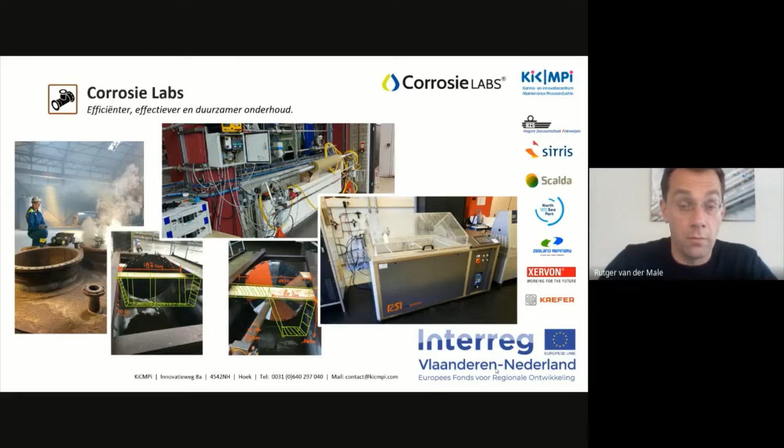Goed, ik denk even genoeg over het project. Dit is even een impressie van wat er zoal gebeurd is tot nu toe, en we hebben nog even te gaan. Dit zijn echt nog prototypes van installaties. In het midden onder zie je van de Hogere Zeevaartschool op het ponton. Boven midden bij Scalda, en rechts meer de situatie bij Sirris. Nogmaals, prototypes. We verwachten in de loop van het jaar, het einde van het jaar, dat we wat meer naar definitieve installaties toe gaan, waarop bedrijven ook gewoon echt hun ding kunnen doen.

Ik zou afsluiten met een kort reclameblokje. We hebben volgende week nog, op 8 juli, nog een webinar, ook vanuit het CorrosieLab georganiseerd, waar Sirris en CUI presenteren. Dan gaat het over met name hoe je corrosiesnelheden kan meten. In de loop van juli, lanceerdatum nog niet helemaal bekend, komt de website live, met veel meer informatie en ook projectresultaten en dergelijke. En in oktober is ongeveer de opening van de verschillende labs te verwachten. Tot zover even het KIC MPI en het CorrosieLab verhaal.

Laten we het iets interessanter maken en KAEFER het woord geven.

Good afternoon, everybody. My name is Clare Watt. Ben has asked me to introduce myself. I'm an integrity engineer working for KAEFER, and I joined KAEFER in 2018 to help develop expertise, innovation and training in the field of corrosion under insulation.

I've got 20 years operational experience in upstream corrosion and integrity management. I've held staff roles within service companies, several international operators, and also worked as a consultant for a few years, providing quite a lot of CUI consultancy to different companies. One of the reasons for this is that every job I've ever done has always involved sorting out some kind of CUI issue. So I've planned, funded and overseen execution of CUI improvement programs, field upgrades, design upgrades. I've provided consultancy, failure investigation, cold eyes reviews, and created strategies and risk-based inspection methods for managing CUI.

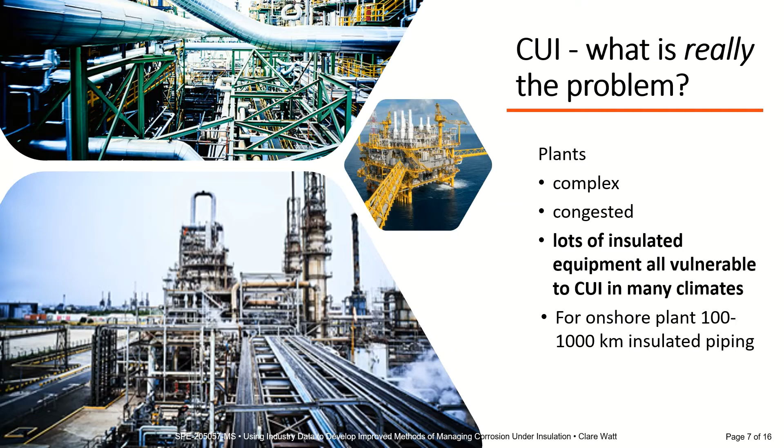But despite this often large amount of vulnerable equipment, significant CUI is often highly isolated, and where it does occur, exhibits wide-ranging severity. So many plants that have fully stripped the insulation from all their critical equipment, either later in life or sometimes following a big failure, often discover most of the equipment's in good condition.

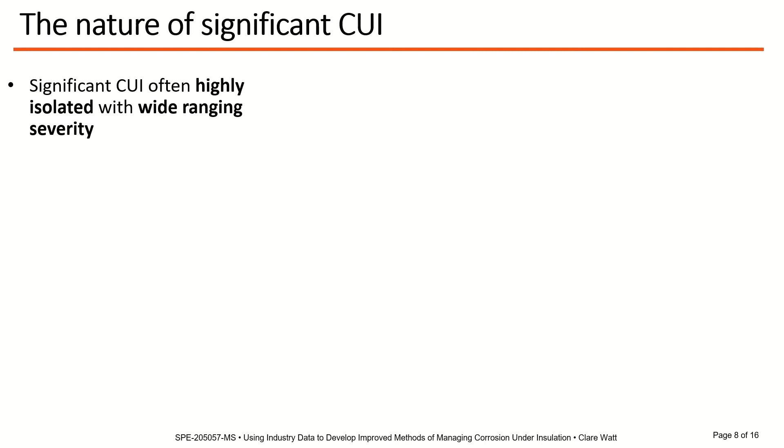In other words, it takes a significant inspection effort to prevent a handful of critical failures in a plant lifetime. And because we can't predict where and when significant CUI will occur, this inspection is resource intensive, so it means high coverage, conservative inspection intervals with a reliable technique such as removal of insulation.

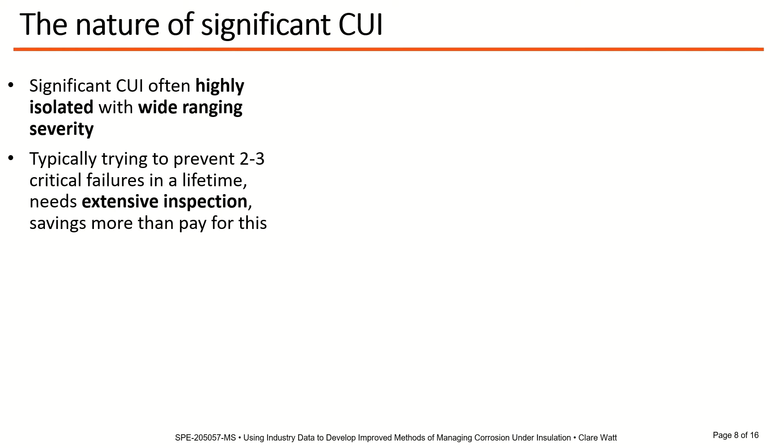Preventing a few critical failures can, however, more than pay for this inspection effort. So it is ultimately often cost effective as well as obviously desirable from a process safety perspective and to avoid regulatory penalties. The knowledge, in fact, existed to prevent these recent critical failures that occurred over the last few years.

But similar plants aren't all implementing the same inspection strategies, and this may have something to do with the fact that any regime can appear to be working for CUI for a very long period of time until a critical failure occurs. The isolated nature of CUI, however, provides a big opportunity to significantly reduce the cost of inspection, and this is what continues to drive innovation.

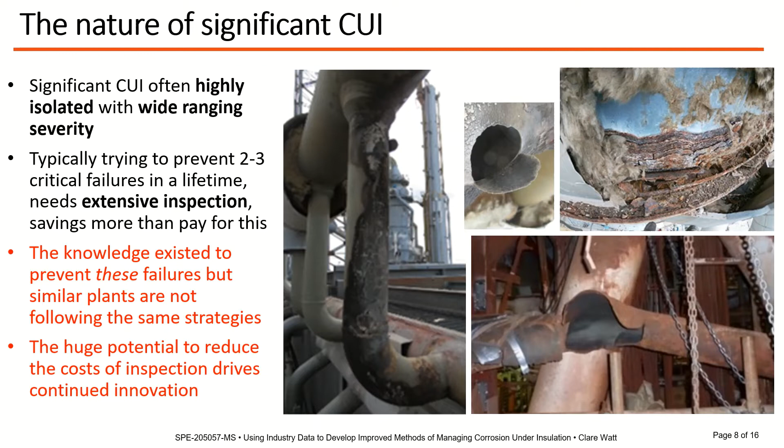Another problem is that it's not often made sufficiently clear that our CUI prediction knowledge comes from real plant data. The problem is that these data are not often widely shared. Only a handful of plant CUI data sets underpin our published and in-house guidance, and each new data set has revealed something new and useful right up to 2019.

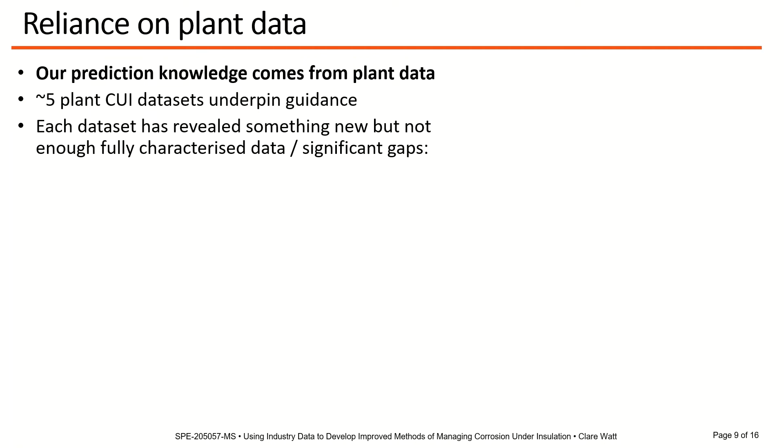But they aren't fully characterized by enough variables and metadata, and there remain significant data gaps, such as critical failures, newer coating and insulation designs, and data from plants in different climates. So here are some examples of shared plant data sets. And you find yourself asking, what would this data look like for certain newer coatings or insulation system designs, or for different parts of the world?

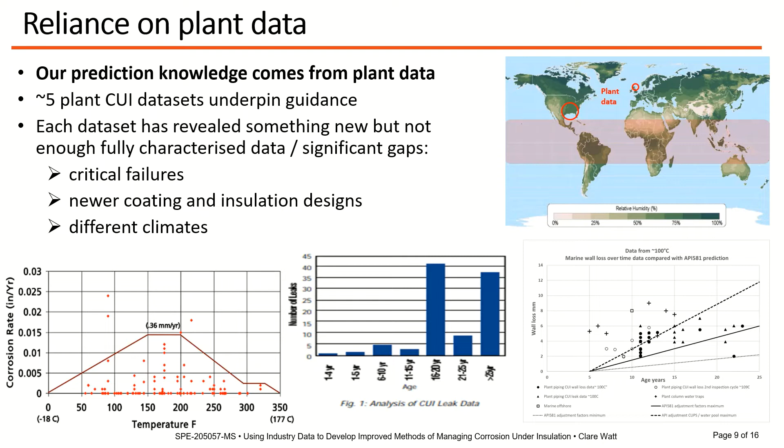So the existing data sets that are shared all come from temperate, high humidity climates, but there are no data for offshore platforms, landlocked locations, arid climates, or those plants located closer to the equator in the tropics, where in high humidity regions, CUI could be much more severe for equipment operating at lower temperatures due to sweating.

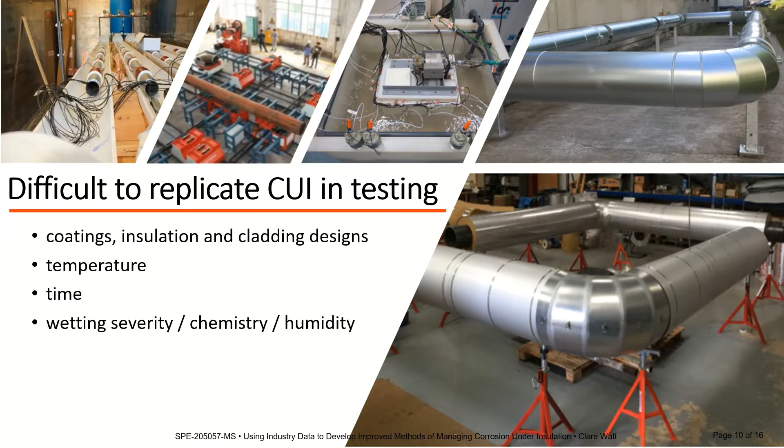And one of the reasons why we are reliant on plant data for our CUI knowledge is that it's difficult to replicate CUI in laboratory testing, or so far it's been difficult. This is because there are so many combinations of influential variables to consider when trying to recreate realistic conditions to realistically predict coating or insulation design or detection technique performance.

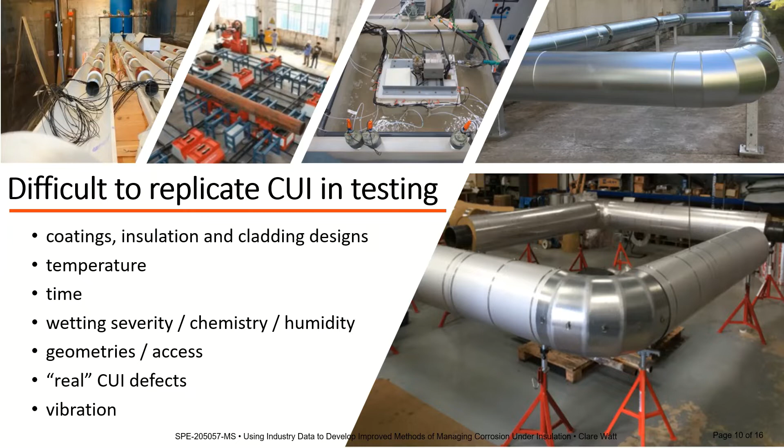So this is perhaps why so far real plants are our ultimate test rigs. These photos all show some recent examples of laboratory test setups. They're a great start, but it's pretty obvious they're quite simple compared with real plant.

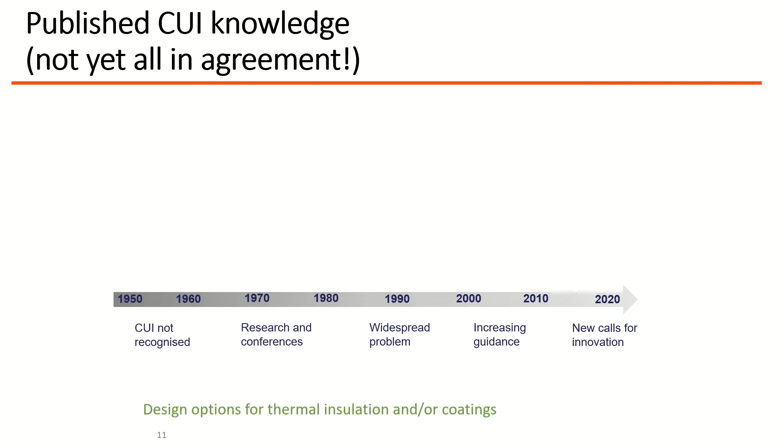We're lucky enough to have a wide range of published CUI knowledge and guidance out there in the industry. But one of the difficult things for individuals coming into the CUI topic area is that this guidance isn't apparent to be in agreement. There's so much of it that you have to read all of it in order to distill a general consensus, and that consensus is that prediction is limited by lack of data, so conventional risk-based inspection methods still have to be conservative.

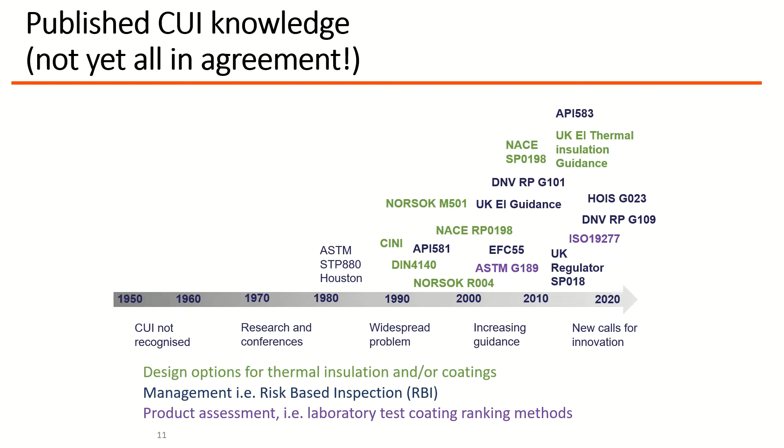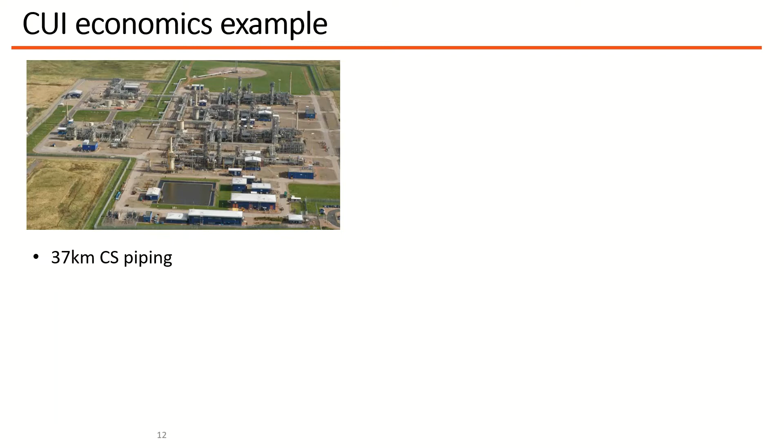This is just an example to show that conservative CUI management can be cost effective, even though it's expensive. This plant had 37 kilometers of insulated carbon steel piping, and it implemented conservative inspection. During the first 30 years of operation, the data from this plant showed that it spent 10 million on looking after this piping, mostly focused on 10 to 15% of the most critical equipment.

And on the other hand, performing this inspection prevented 3 to 4 critical failures, which would have cost much greater than 10 million. So overall cost effective, though expensive. But we do wonder whether this is true for all plants.

Putting all this information together means that there are some key challenges facing the evaluation of the performance of new CUI technologies, which impacts their integration into our day-to-day CUI management regimes. There's a wide range of innovative products and CUI solutions out there, and these can be divided into 3 categories: prediction, design, and detection. All these categories interact with and influence each other, so it's highly likely that industry will need to make progress in all these areas in order to move forwards.

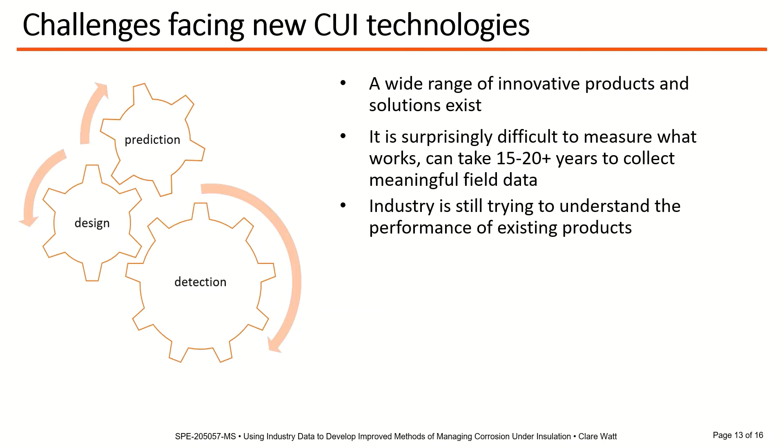It's surprisingly difficult to measure what works for CUI because we rely on field data. It can take a long time to collect meaningful data, and perhaps that explains why the industry is still trying to understand the performance of existing products, some of which have been around for quite a few years. Currently, no technology has yet been proven as universally better at preventing critical CUI failures than conventional reliable inspection.

For example, marine plants in a temperate climate might inspect their carbon steel insulated equipment every 6 years by periodically removing all the insulation, at least for the most critical equipment operating at higher temperatures.

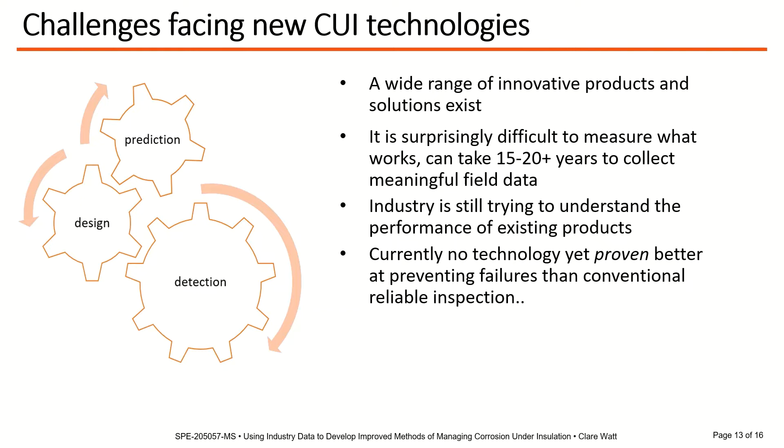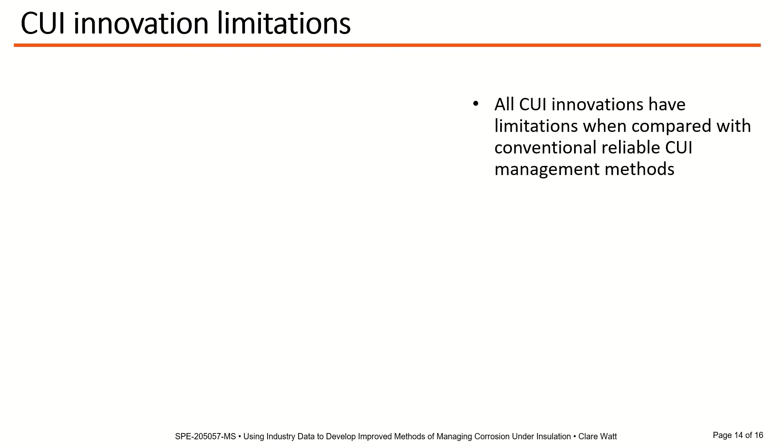And there are some key common factors that stand out. Some solutions aren't widely deployed, so they've not been given a chance. For example, drain holes, widely recommended in key published insulation design good practice, and yet they're hardly ever adopted.

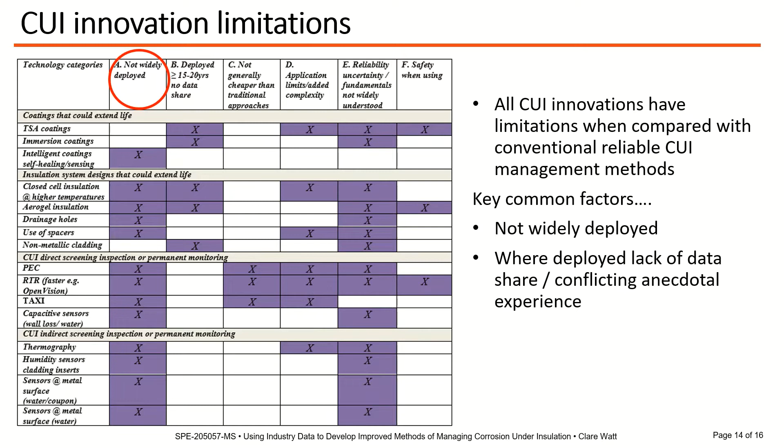Where products have been deployed for long enough, such as superior coatings, closed cell insulation at higher temperatures, and others, there's a lack of shared data sets and also conflicting anecdotal experience, which probably both contribute to a general uncertainty in reliability or performance. It's worth mentioning that there are other limitation types, such as application limits, cost effectiveness, or safety when using, which also drive the limited use for some of these products.

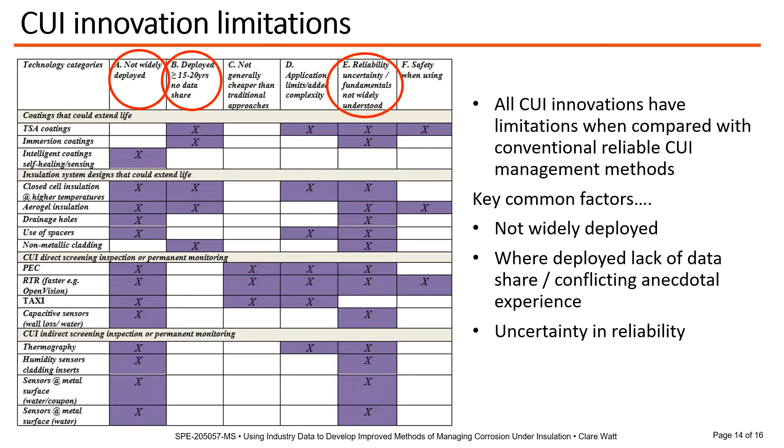So if we look at an analysis of 13 recent critical CUI failures - and critical CUI failures are not widely shared, and there are probably more - these come from marine, onshore and offshore facilities in a temperate climate. The majority would have been prevented by using reliable inspection schemes that some plants are operating today.

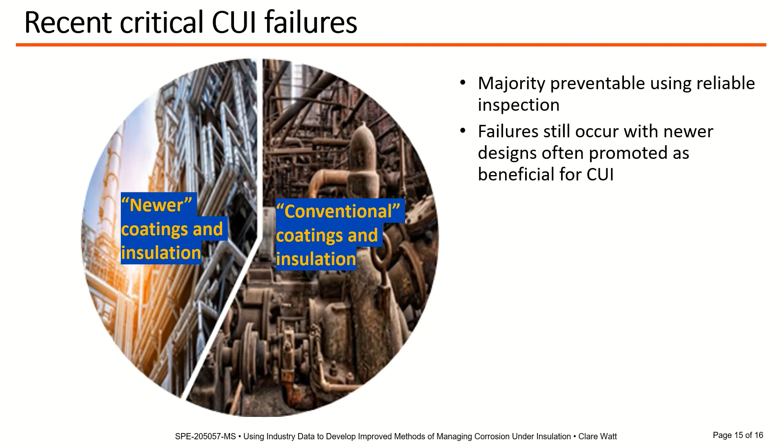But failures continue to occur with newer coatings and insulation designs that are often promoted as beneficial for CUI and for which many operators take credit in order to relax inspection. So is this simply a quality control or application issue, or is it a fundamental limitation of some products that has been discovered in the field that could be avoided if better shared and understood? There is an opportunity to improve the use of existing products before dismissing them due to isolated failures.

So here are some examples of the limitations of some CUI design solutions.

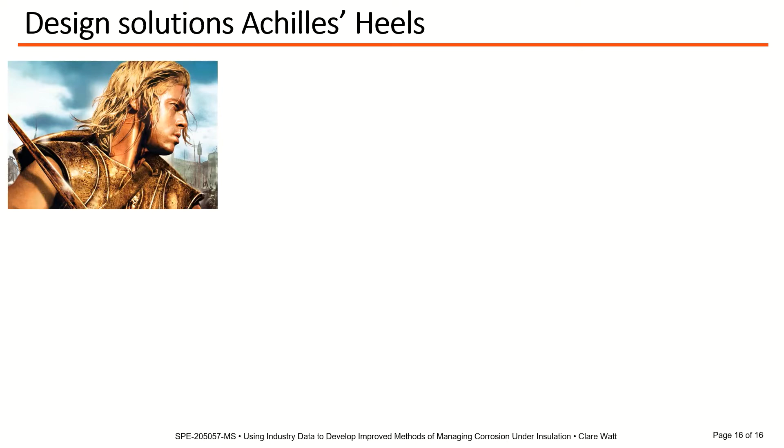Hello, Brad Pitt here, representing the Greek warrior Achilles. The definition of an Achilles heel is an often surprising weakness in an otherwise strong or powerful product.

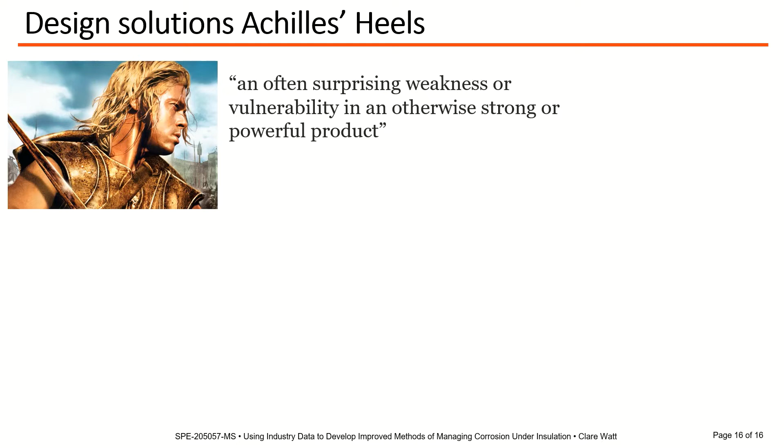It's currently believed by the majority of organizations that a superior coating, such as thermal spray aluminium, a closed cell insulation, and a non-metallic cladding weather barrier, all represent the best combined insulation system design choice to combat CUI. But if these materials aren't deployed correctly, they can actually accelerate CUI and make it more severe than it would have been for conventional insulated systems.

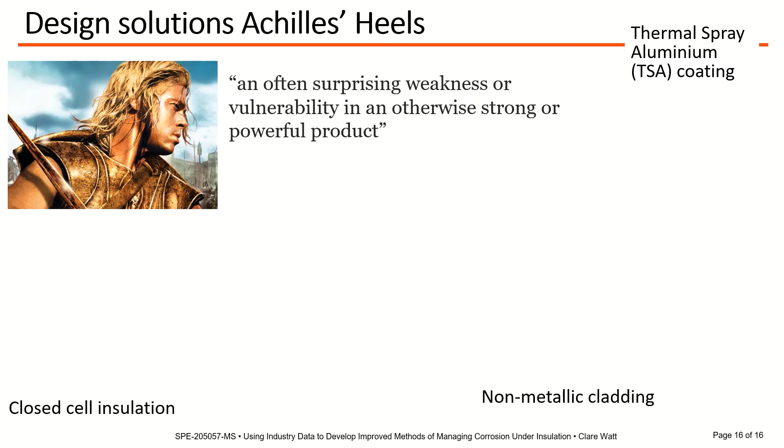For example, TSA is vulnerable to occluded cell corrosion, which can be initiated by applying a too thick sealer or top coat, or anything else that forms a tight crevice at the equipment surface. As far as we're aware, it's only been reported for marine environments, as chlorides are involved.

Closed cell insulation might not absorb water, but water can still get trapped at the metal surface and cause CUI. And the use of adhesives to fix the first insulation layer can not only accelerate CUI, but also cause it to occur in unusual locations, which might not be detected by prone area inspection schemes.

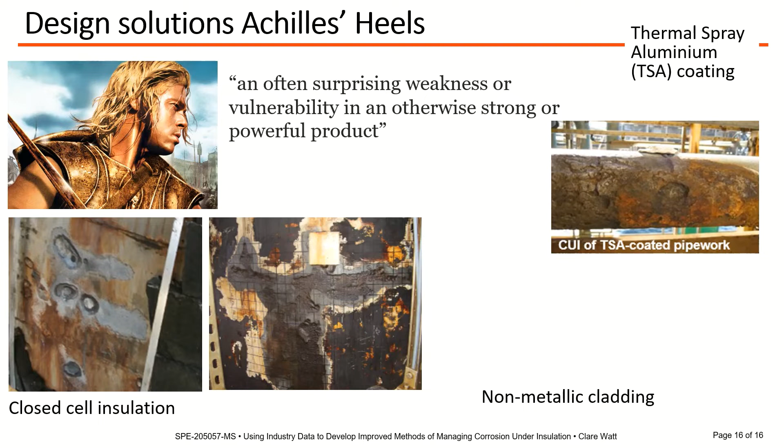On the left, corrosion rates of 2 millimeters a year being reported, and on the right, maximum cumulative metal loss of 11.5 millimeters over 6 years in service.

Finally, drain holes are especially important to apply for non-metallic cladding.

However, we don't believe that any of these Achilles heels, or the conditions that trigger them, are sufficiently widely understood. But the good thing is they could all be avoided to maximize the value of these products, to slow down CUI, or at least not to make it worse.

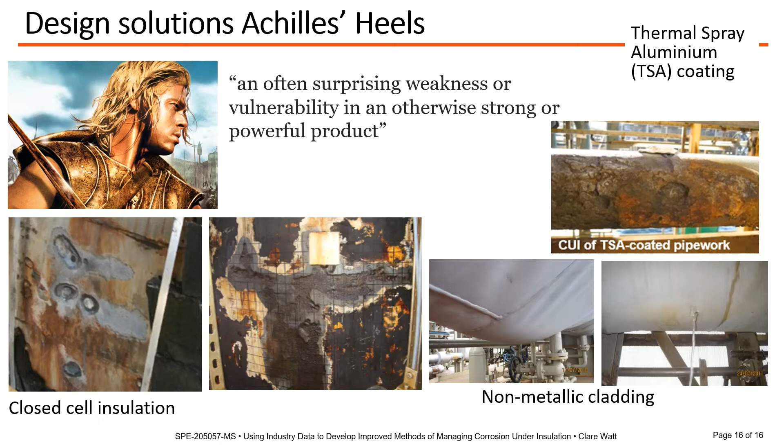So I'm just going to, with this slide, click through some of the serious CUI inspection findings and failures that we're aware of that occurred over the last decade or so. I'm going to try and speak about them in a general way while introducing them on the slide, which is quite difficult.

So the first thing we notice is that they occur for different temperatures, over different timescales, for materials of different wall thickness and different designs.

Collectively, they do teach us to be very careful not to make too many assumptions when predicting CUI for highly critical equipment, whether it be associated with wetting, taking credit for different designs, or where the CUI will occur. For quite a few of these, there were no visual signs of CUI before removing the insulation, and many occurred in locations considered as lesser prone areas, which might not be inspected by some company inspection schemes.

So API 581 estimates, however, could well double the CUI timing experience if the plants were located in a landlocked area compared with these marine, onshore, offshore examples, which I find really interesting.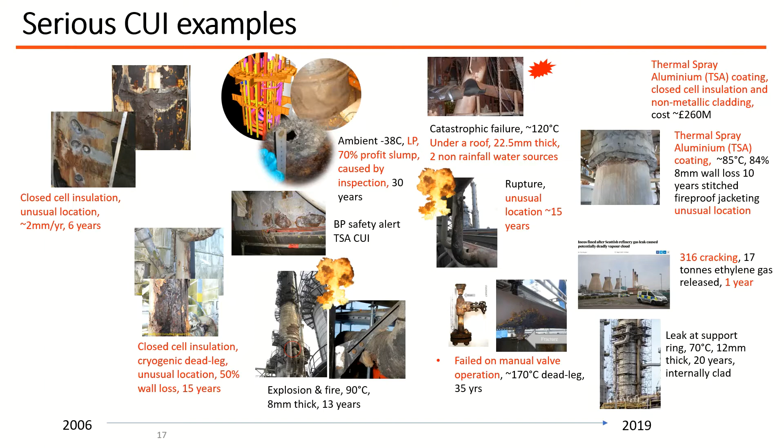We're still getting TSA reported issues today, but it would be really good to confirm that these are QA/QC or occluded cell issues that we can learn from and avoid. So it would be great to have more of these failures reported and logged in a database and compared with general good performance in order to perhaps do some more effective prediction. As I indicated previously, there is potential to improve CUI prediction by sharing more plant CUI data.

This is just an example only, but here's a set of real CUI data: metal loss in millimeters versus time in years. And this applies to carbon steel CUI failures or inspection findings. There's no key, so you don't know what it means. That doesn't matter, because I do.

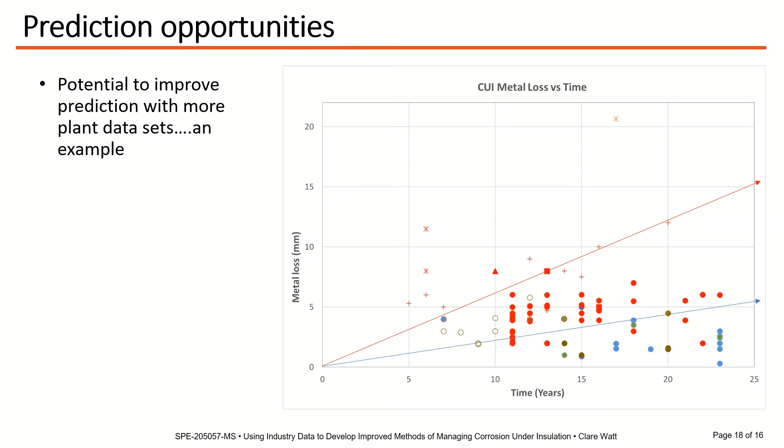The blue and green data shows that CUI proceeds much more slowly for equipment operating at lower temperatures, that's ambient and below, compared with higher temperatures. But whichever way you draw lines through this data, there are significant outliers for each temperature category. And if we knew more about the background metadata, we might be able to identify common parameters to target where to inspect for particularly severe CUI.

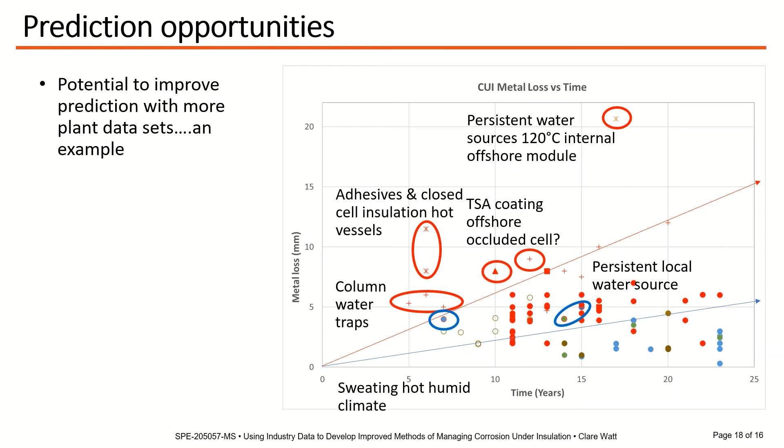And we could also then optimize inspection timing or even locations for the rest of the equipment using temperature, geographic region, or even design difference metadata between data sets. This hasn't been tried yet, but there are projects that are being set up to give it a go. It could be really promising.

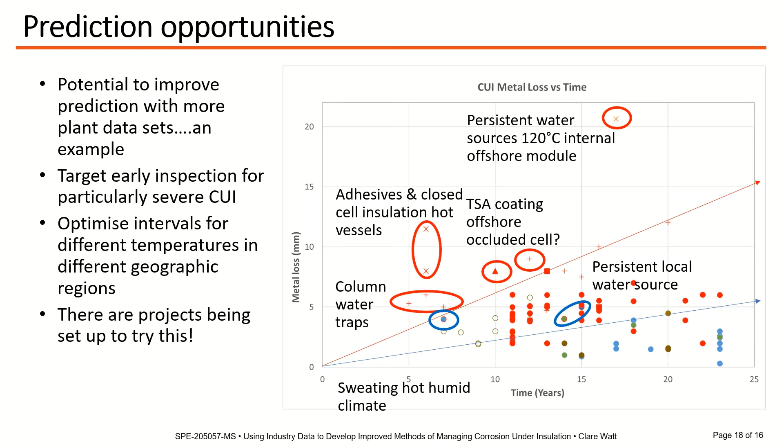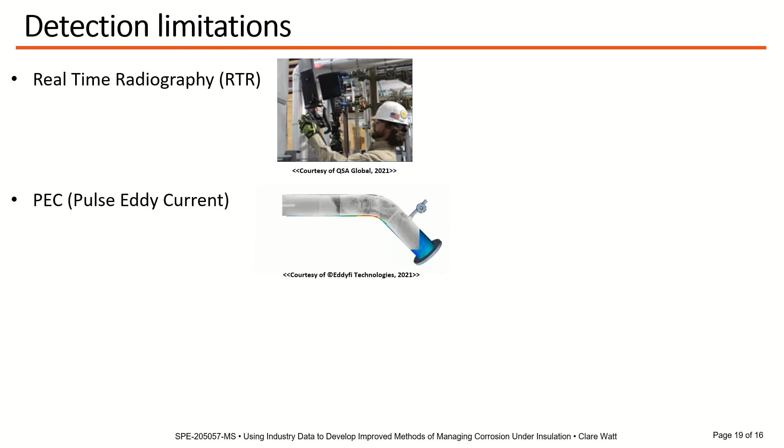So non-destructive detection techniques also have limitations, and some of the most promising for carbon steel insulated equipment are real-time radiography, pulse eddy current, and sniffer dogs. Real-time radiography has been widely used in America for many years now with positive results, but not in Europe, where radiation exposure safety concerns are different.

Pulse eddy current has the advantage of being able to be applied to vessels as well as piping. It's still expensive, but often faster than insulation removal and reinstatement, which makes it really attractive for offshore assets where bed space is at a premium.

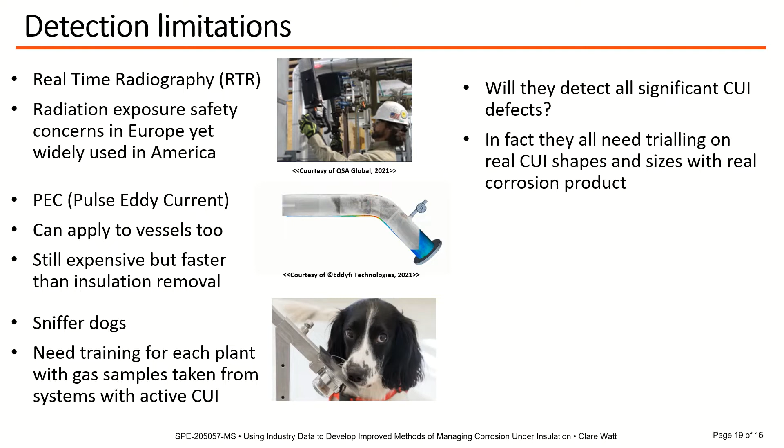Sniffer dog technology, pioneered in Norway, has shown great promise, but there is a need to train the dogs for each plant with gas samples taken from systems with active CUI, which is quite difficult to organise. The big question is, will they detect all significant CUI defects? And in fact, because of the way they work, they all need trialling on real CUI defects and corrosion product.

There might be some useful data that can come from laboratory simulated defects, especially for pulse eddy current, but ultimately the best way to evaluate these techniques is to deploy them prior to large insulation removal programs, although this increases the cost of an already expensive exercise. I'm not aware that it's been done.

RTR and PEC do have application limits, so they can't be used for all equipment. And that means that to achieve sufficient CUI inspection coverage, mixed technique inspection schemes are required, and this could be quite difficult to control.

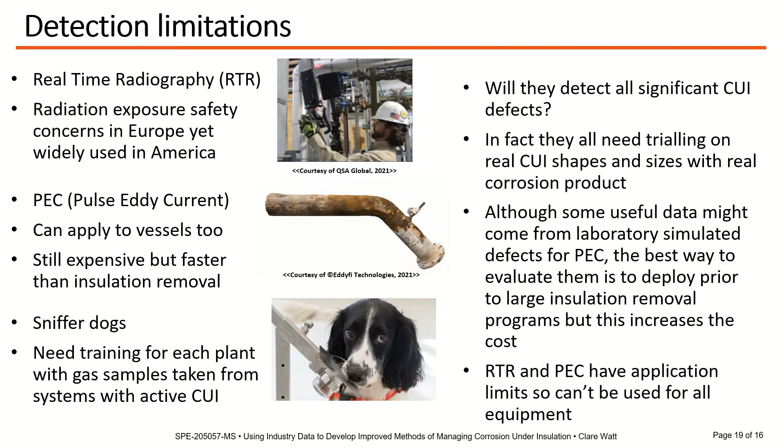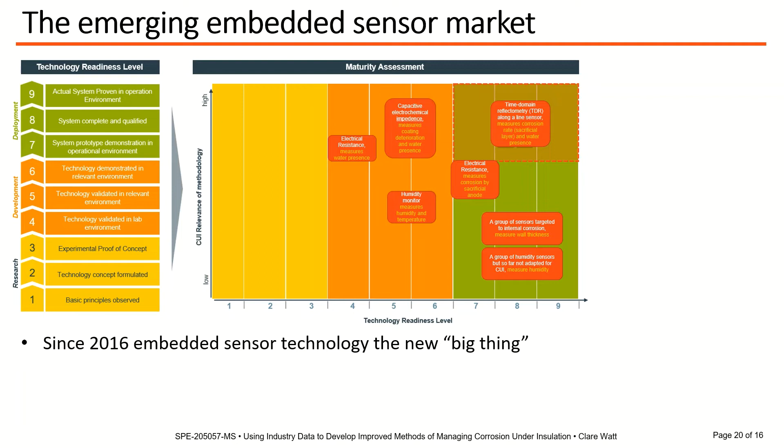So this brings me on to the emerging embedded sensor market, which has evolved rapidly since 2016. It's the new big thing to tackle CUI. And that's because permanently installed sensors have the potential to locate where significant CUI could be occurring before it reaches the stage where it causes problems.

And there are lots of different technologies. One is ahead of the others in terms of commercial deployment, but there are many with widely different approaches becoming available for plant trials. So on the one hand, this type of technology could work really well, providing email alerts to operators or inspection engineers, indicating locations in the plant where there is excessive water and humidity in the insulation system, or coating degradation, or even corrosion of the equipment surface.

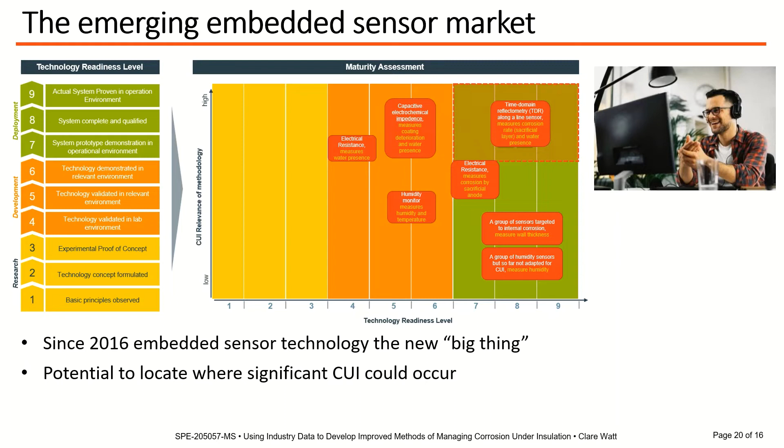But we still don't know, on the other hand, how the data will look and how to use it to best advantage or to deal with false positives. One thing's for sure, they will all need plant trialing and testing.

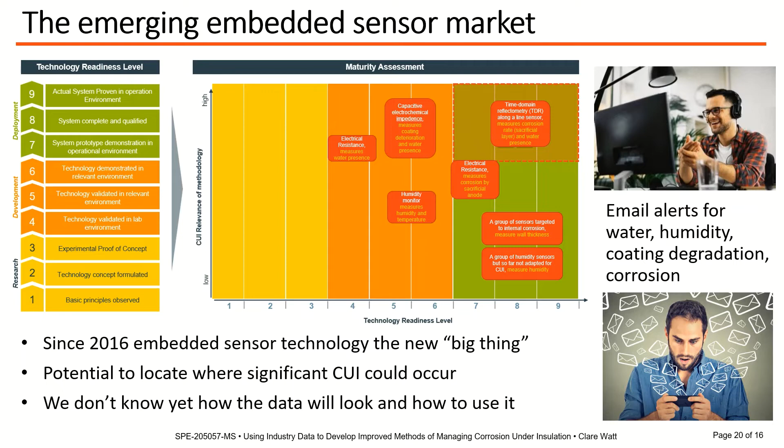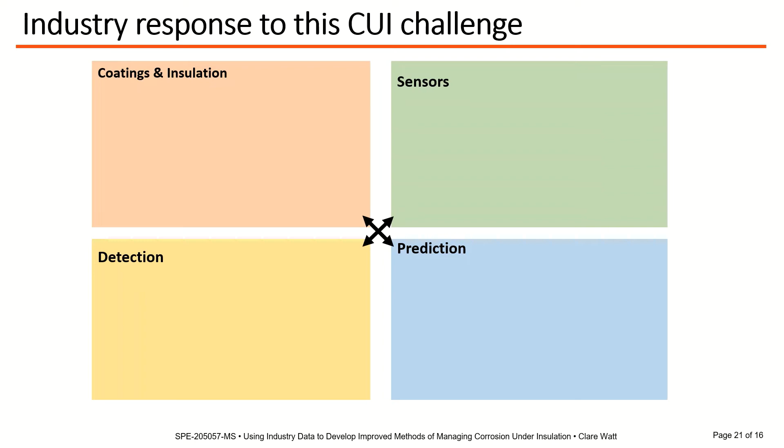So the industry is responding to this CUI challenge to understand the performance of different CUI technology solutions in the fields of coatings and insulation, sensors, detection and prediction. The paper illustrates the various initiatives that are ongoing in the world in each of these areas, and some that stand out are the NACE, or now AMPP, Task Group 516 initiative to standardize the CUI qualification testing to compare different coatings.

The HOIS Joint Industry Project, recently completed in 2020, evaluated different non-destructive inspection techniques for CUI, and there's a very informative publicly available report. The HOIS is now running a new project to understand more about PEC capabilities specifically.

SINTEF has kicked off a 3-year Predict CUI project to understand more about water and vapor movement within insulated systems. The goal of this is to try and make plug-in humidity sensors work, which would be great for brownfield assets because you don't have to remove the insulation in order to deploy such sensors.

DNV in the field of prediction has done some excellent work publishing the first publicly available, simple, fully qualitative RBI risk management methodology. Can you believe it's taken so long to put something like this in the public domain? It's a big step in the right direction, but still qualitative, and therefore could still over or underestimate CUI.

Generally, it's conservative. There are plant CUI data collection projects afoot to train predictive models, Curtin in Australia, and a proposed UK project to collect CUI data on a large scale, with various private projects completed in this area reporting success, but not widely sharing the data. In summary, there's a lot of good work going on, but it all requires funding, and we hope that the technical learnings could be shared in a coordinated way.

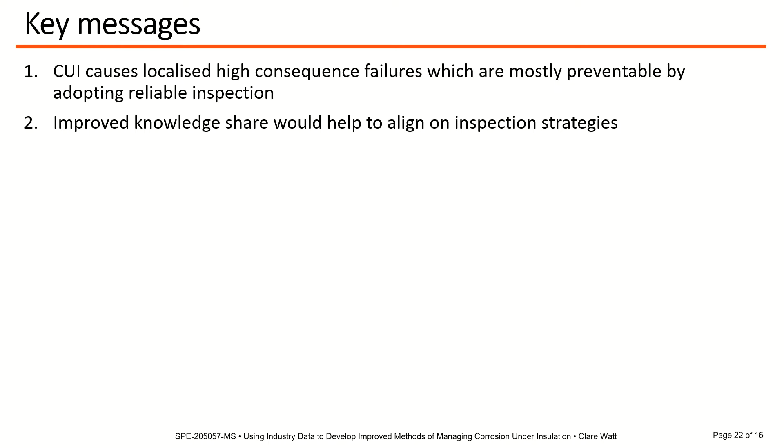So to summarize the key messages from this work, CUI causes localized, high-consequence failures, which are mostly preventable by adopting existing reliable inspection techniques. But improved knowledge share would help to align on what reliable inspection really means, and this could differ for different plant types in different locations. It can take a long time to prove CUI technologies because they have to be validated in the field.

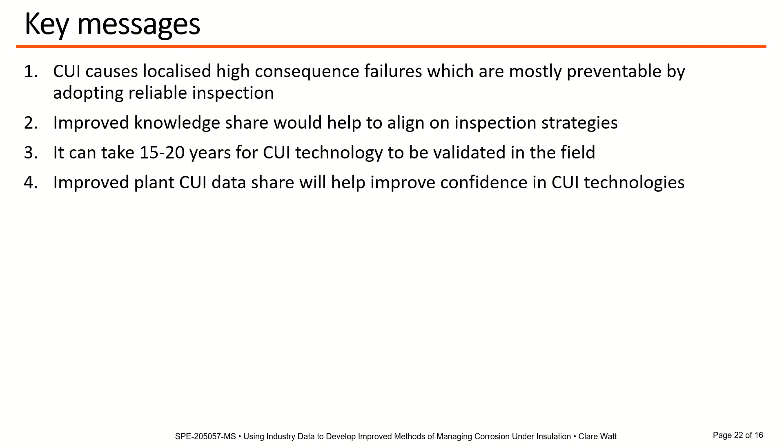An improved plant CUI data share where they have been deployed would help improve confidence in their performance. Detection techniques could be proven more quickly by targeted field tests, laboratory tests, and deployment prior to 100% insulation strip programs. But ultimately, operators and plants have a really important role to play in sharing CUI data and investing in effective field trials. This could be argued as just as important as the development of the actual technologies themselves. If this can be done, then the next 3 to 5 years could yield some real step change improvements.

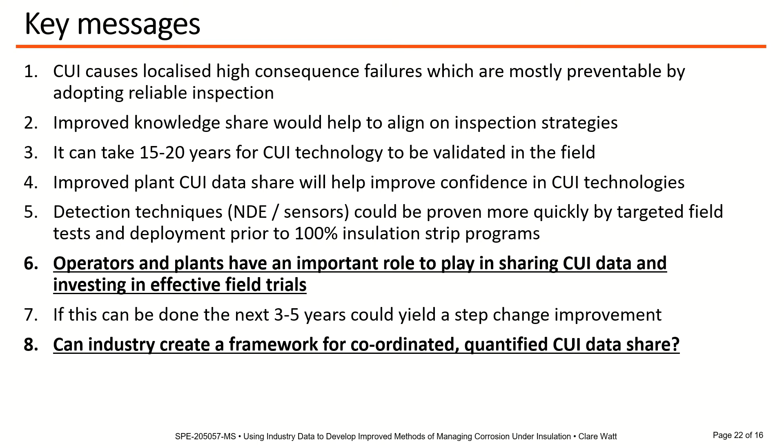The big question is, can industry create a framework for coordinated, anonymous, quantified CUI data share? Because without data, it's just another opinion. And an opinion really isn't good enough to try to prevent highly critical CUI failures, which can have big safety and economic impact on an asset.

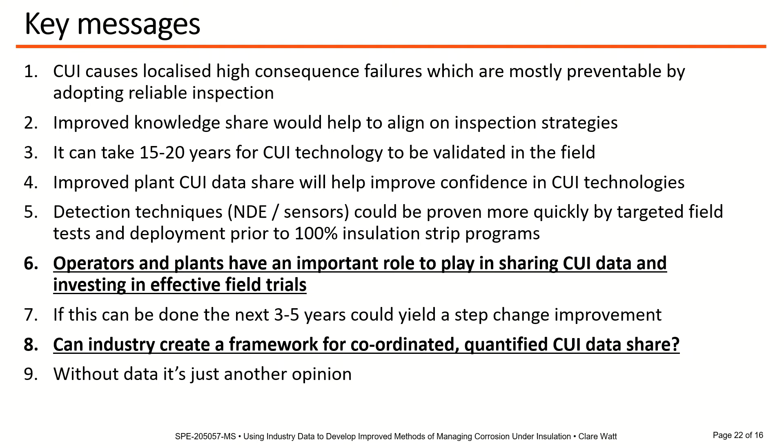In fact, there are a lot of CUI forums that exist or are being set up in the world today, which allow people to share ideas and best practice in an informal way. So there's one in Norway, one in the UK, and EFC 15 is starting an initiative for Europe. But this isn't the same as quantified CUI data share.

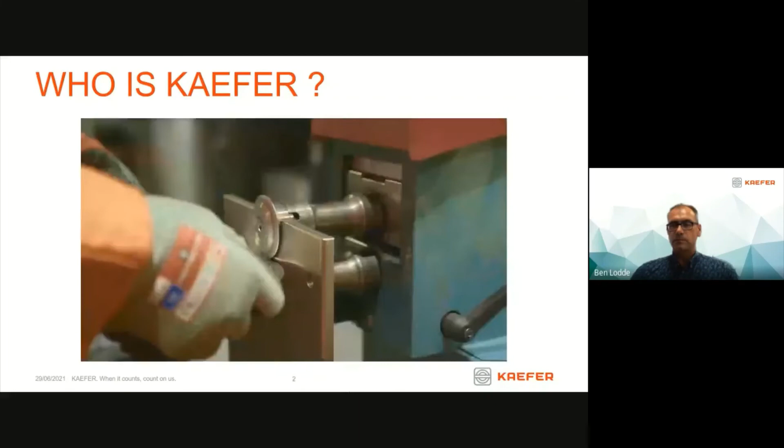We work on projects that count for our clients, our people, and you and me. From power plants and pipelines to ships and offshore platforms, refineries and mines, to tunnels and buildings. Whether you can see it or not, whether above ground or below, whether it's close to you or far away, all of the things we do make a difference. We're the ones people count on. The thermal, cold, cryogenic insulation. We are the ones responsible for safe access solutions and passive fire protection. We are the ones who protect surfaces, outfit interiors, and provide mechanical services that maintain the performance of our client sites. We're efficient and reliable, and we look out for the health and safety of one another. We are the people you can count on to get the job done, even in the most challenging environments. We're proud of that, but we don't stop there. Every single member of our international family is driven by the spirit of continuous improvement, because we care, because we work on projects that matter. Because we're KAEFER. When it counts, count on us.